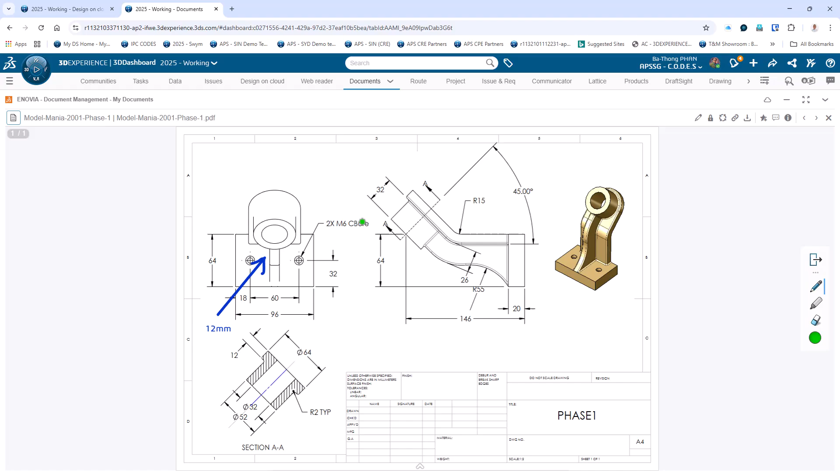And the most important here is the profile of the rib in the middle. So those two dimensions, 146 and 64, are important because they determine the center of the hole in the middle, or the center of the cylindrical boss.

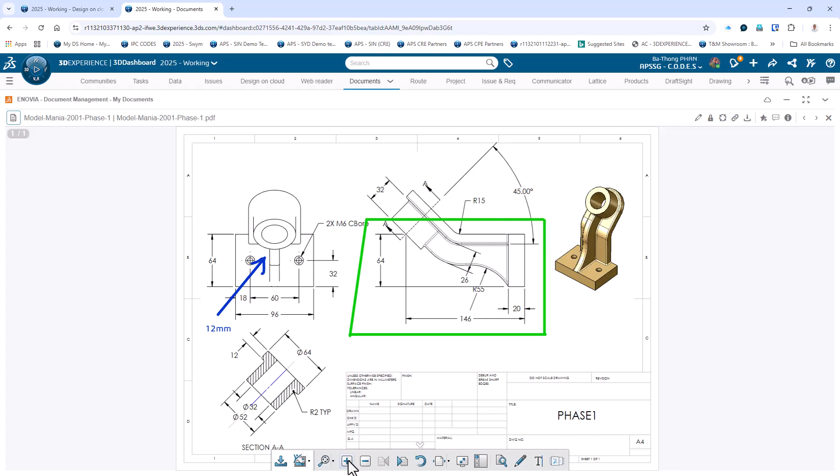So we gotta make sure that point - everything will start from that point. That's how we will build the profile of the back plate. So it all starts from that point, which is the center of the top face of the cylindrical boss, or the center of the hole.

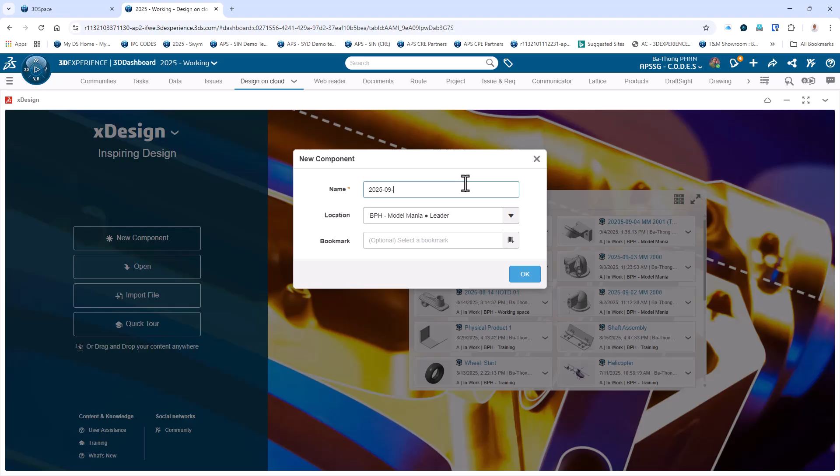So let's start with xDesign. I start with a new component. I name the component and select Model Mania as the 3D space where I'm gonna save the model.

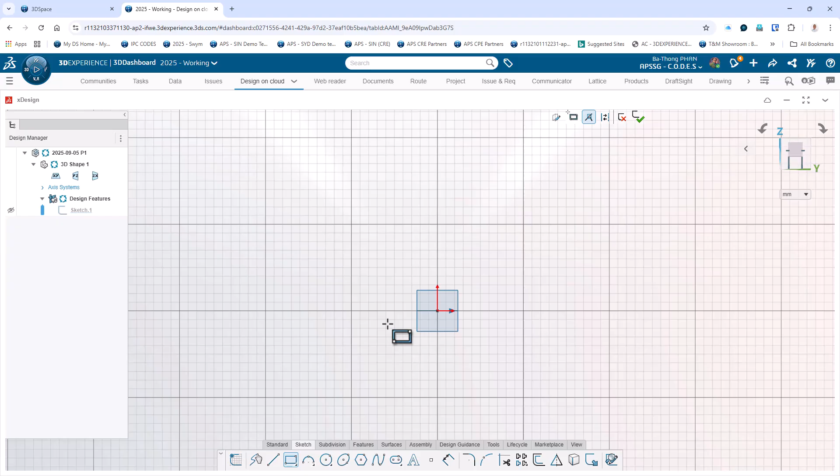Okay, we start with the rectangle on the YOZ plane, and that rectangle will be 96 by 64. You see that it's very similar to SOLIDWORKS actually when you use it.

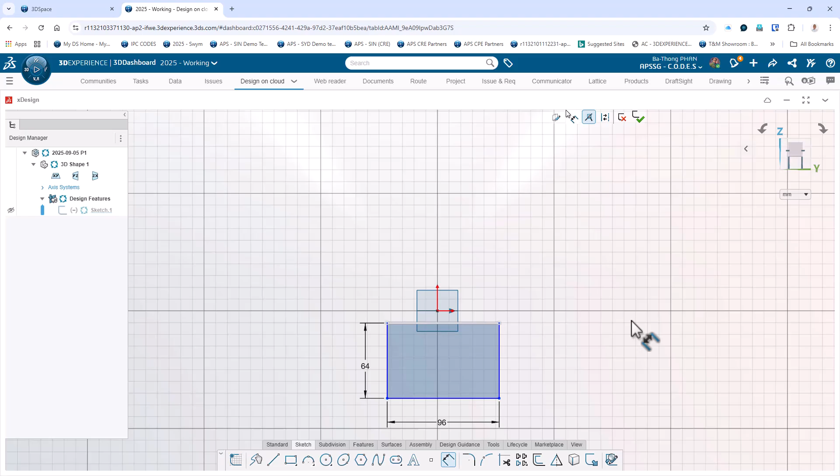So we'll add the dimension, 96 and then 64, and I will center that rectangle. I make sure the origin is in the middle point of that edge.

Now the sketch is turned black instead of blue because it's fully defined. Now going to the features, I'm going to select the extrude.

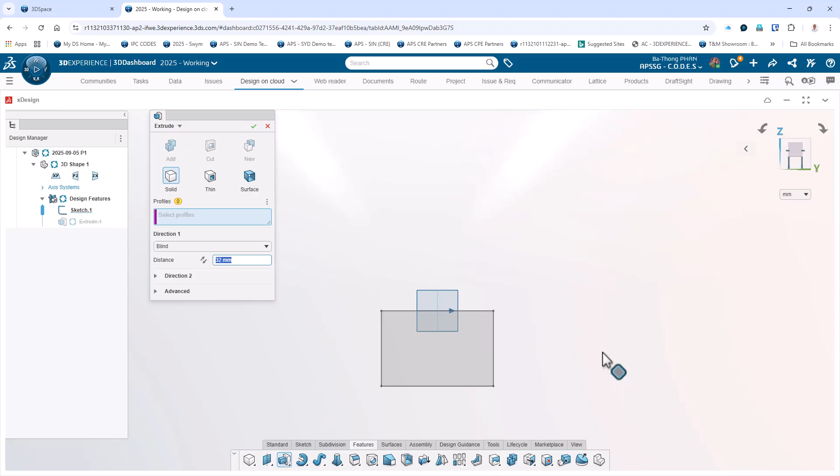And we're gonna extrude with a thickness of 20, a height of 20. Perfect.

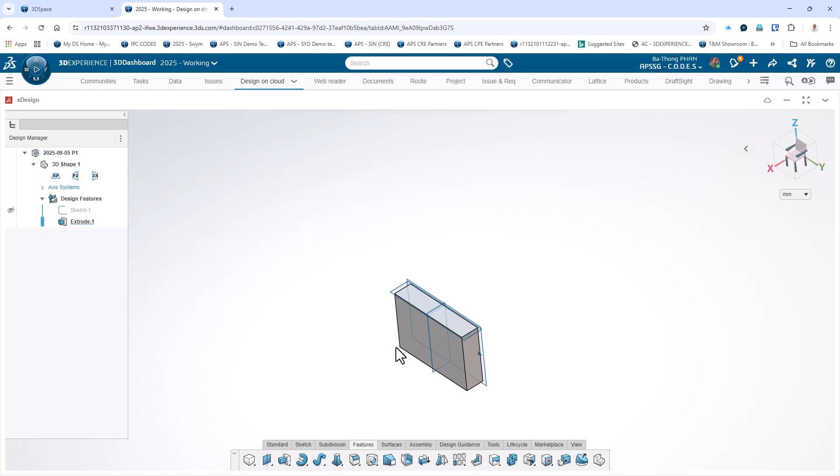Now I'm going to have a construction line. I will create a construction rectangle with the dimension 146 and 64.

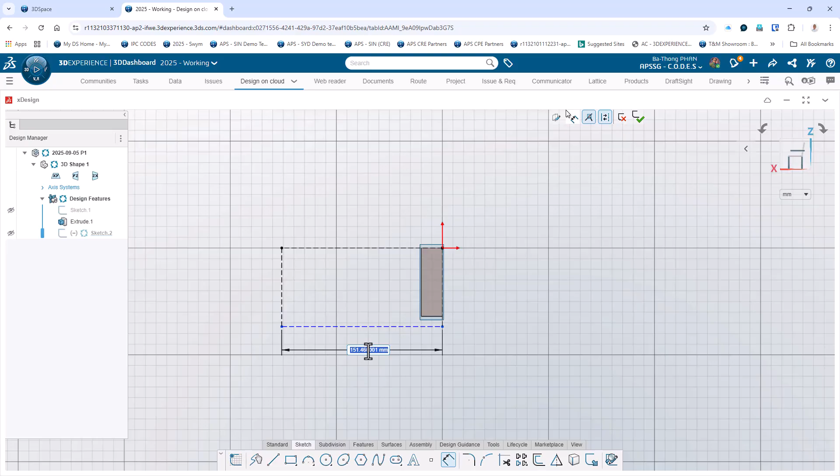I change the construction line and select the first point of the rectangle and the other diagonal point of the rectangle, and put the dimension 146 and 64.

Next, I'm gonna build this axis, the axis of the hole or the cylindrical extrusion. That axis is 45 degrees to the horizontal line, and the length of that axis would be 32, plus the thickness of the plate would be 12.

32 plus 12, that will be 44. So we're gonna build the profile based on this construction line.

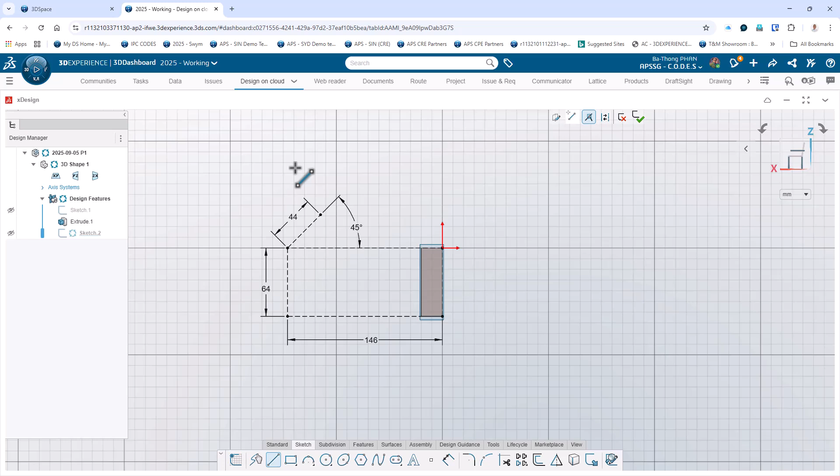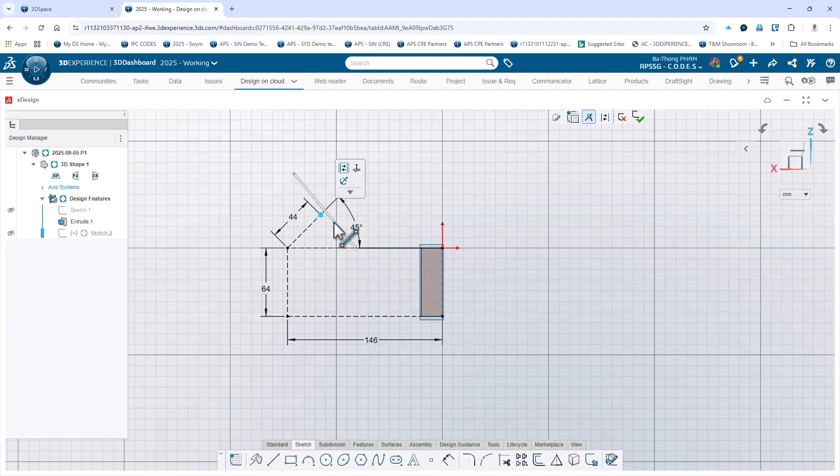So I get one line, and then have another line, and I want to make that endpoint connect to that line - coincidence.

And I will measure from that point to the side, to the endpoint, which will be the 64 diameter, so it will be 32.

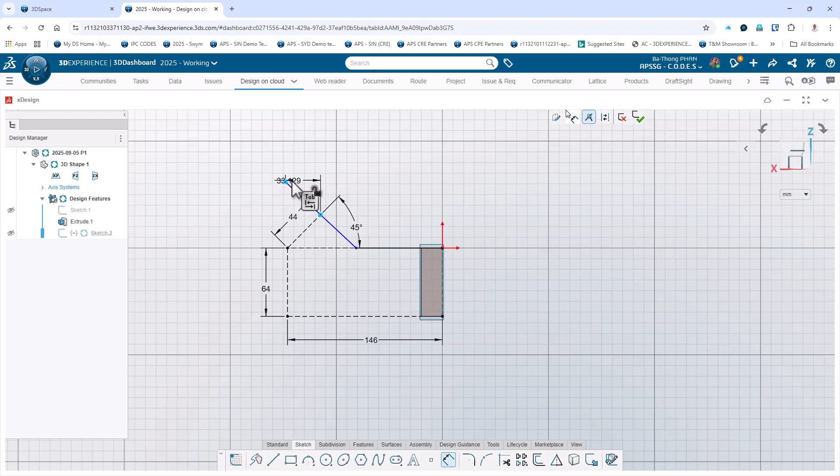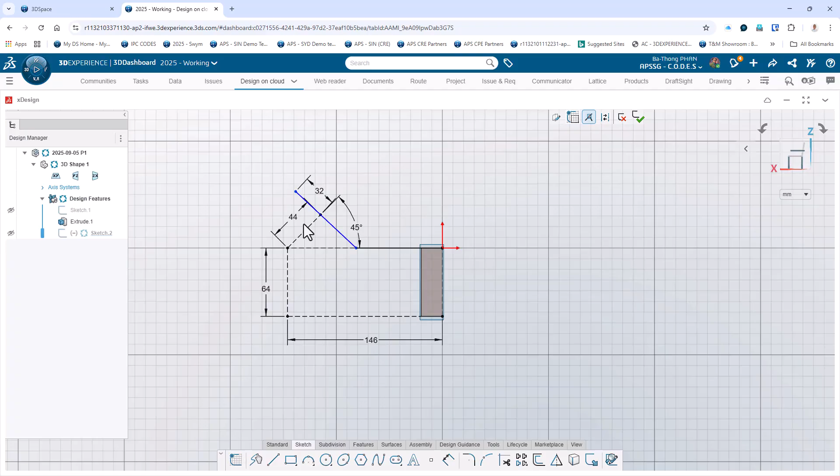Now we also make sure this and this are perpendicular. And yes, the two lines turn black because it's now fully defined.

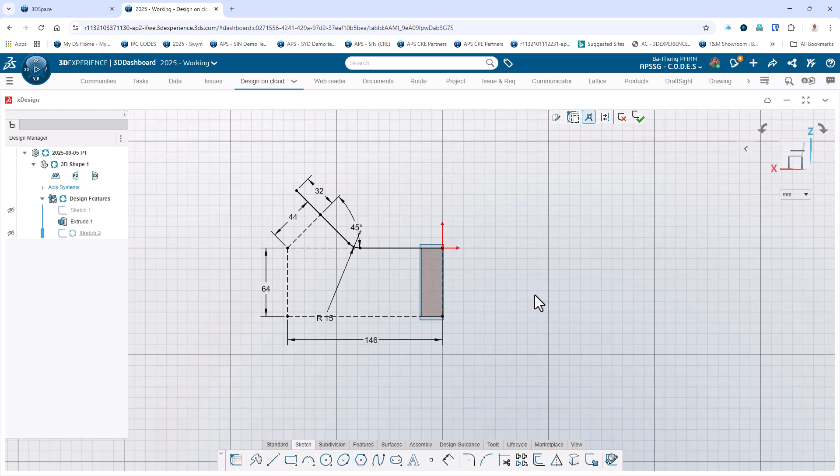We just need to add the radius of 15, and we're almost done with the profile.

I need to create a parallel of 12. I don't want bidirectional, we just want one side.

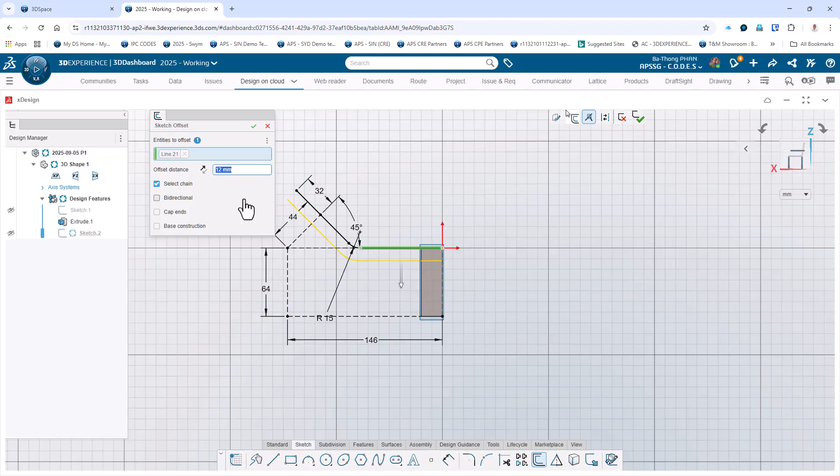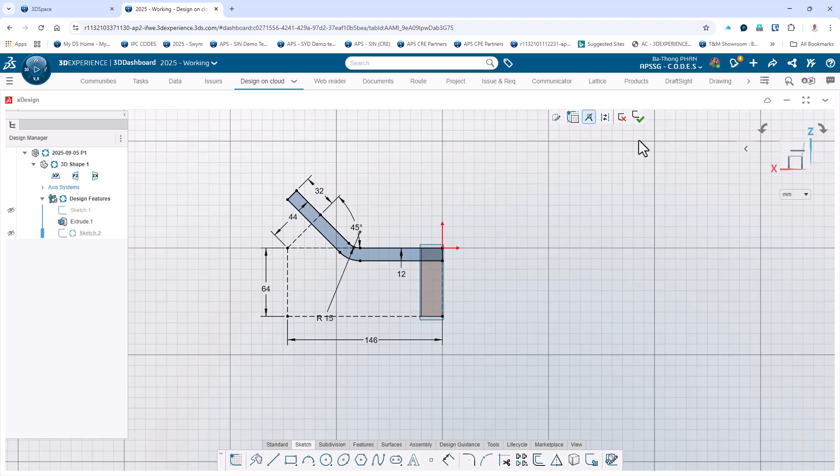Okay, you can see that it's coloring the profile because it recognizes that this profile is now completely closed. So you can create an extrusion from this profile because it's closed.

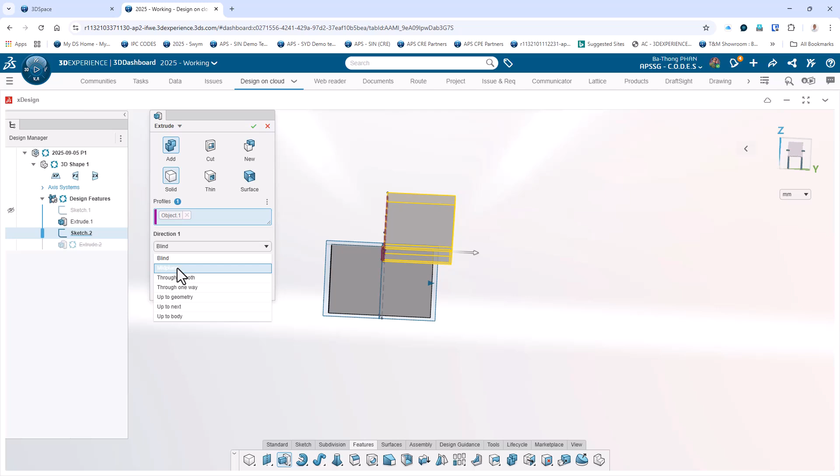So the thickness of this extrusion will be 64. I choose the mid-plane option.

And now we need to round the edges. So I use the full round feature, and I need to select the three faces.

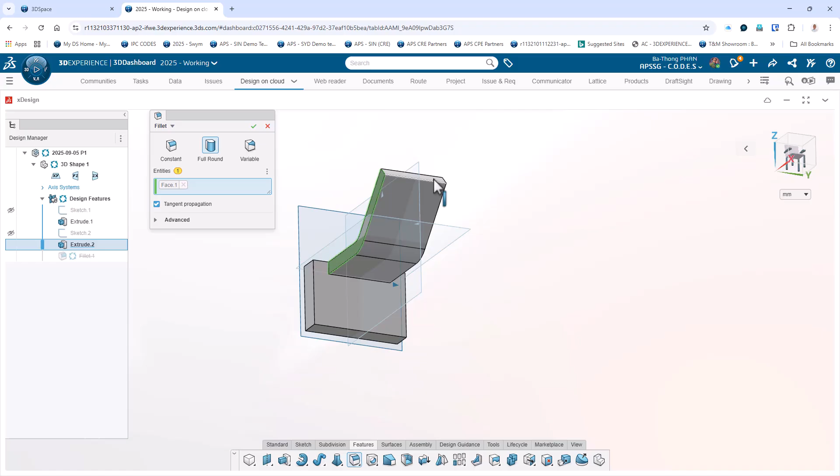If I'm not wrong, in SolidWorks 2001, we didn't have that full round fillet yet.

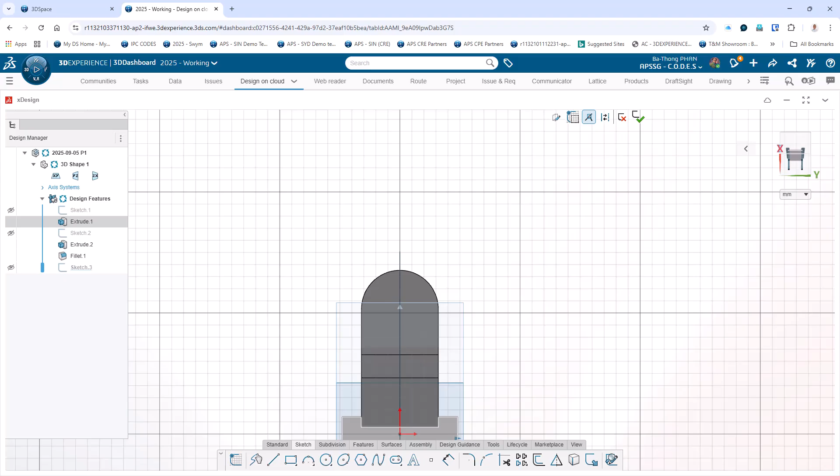So now I'm using that face to create the cylindrical boss and the hole. So I create the circle, the first circle of 52, and then the second circle of 32 will be the hole.

I put the dimension. Yep, it's 52 and 32.

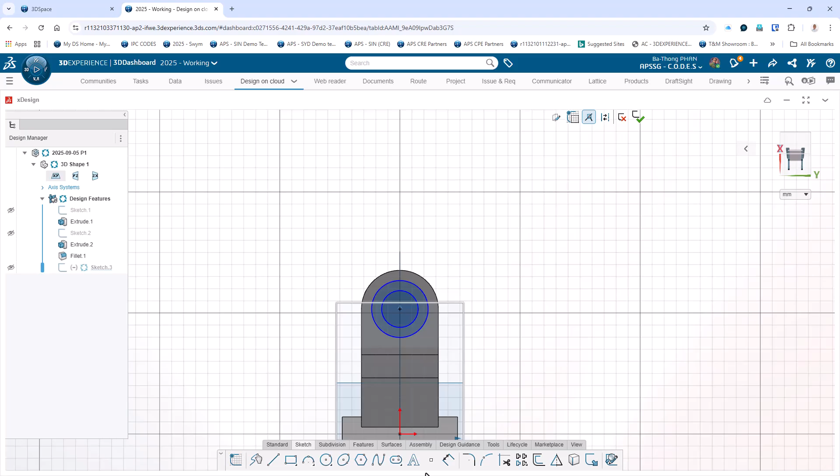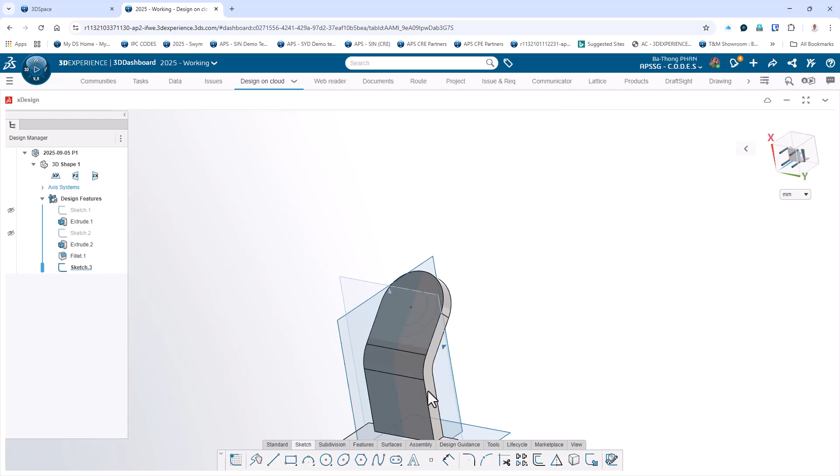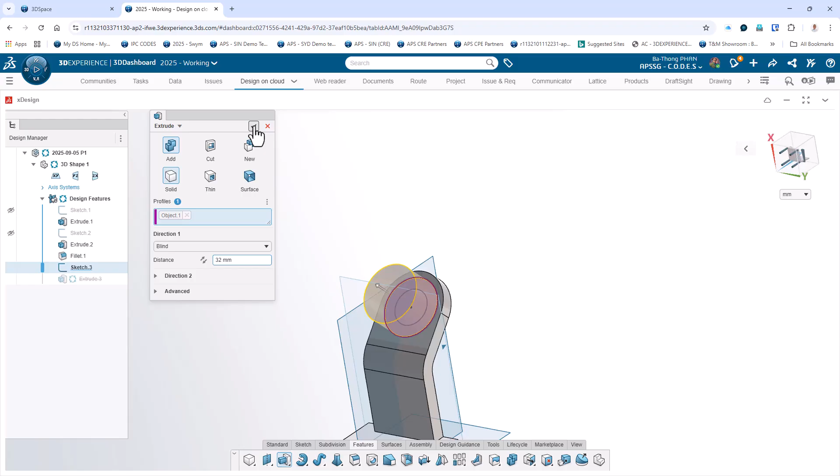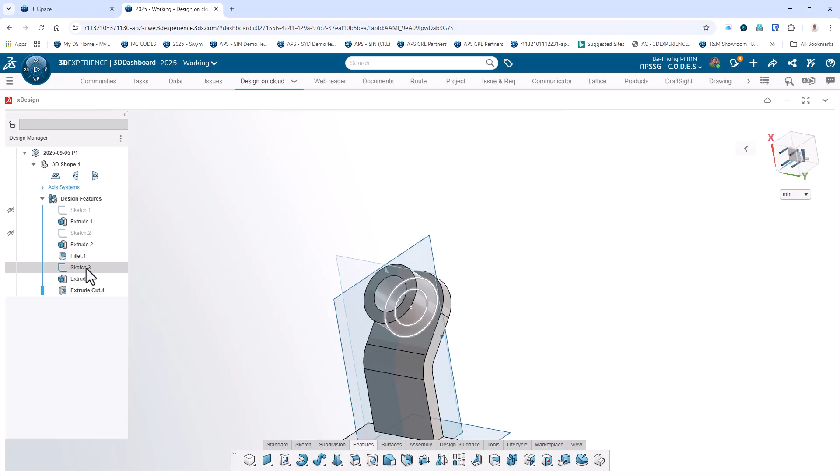Right, exit the sketch. To create the extrusion, I will probably need only the outside circle. It's the 32. And after we complete the command, the sketch is invisible, so I make it visible again, so I can select the inner circle and use it as a hole. Now I make it invisible again.

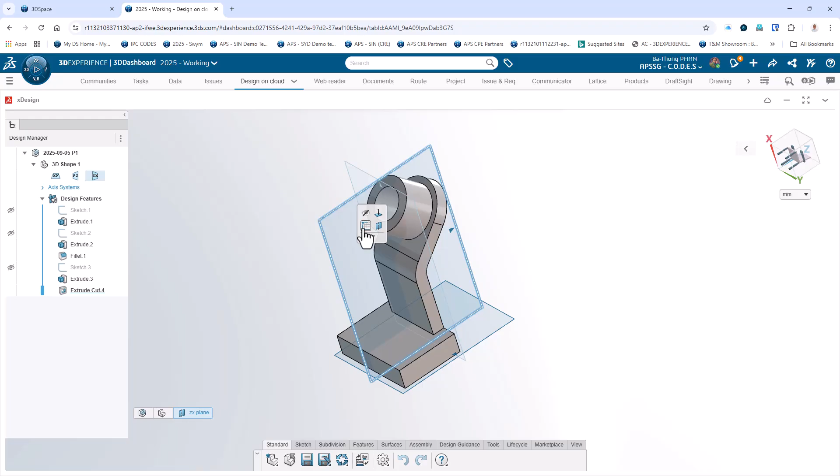So pretty much done. Now we need to build the profile of the rib. So before this, I'm going to save the part first and go to the sketch. We need to extract some profile. So I turn this profile as part of the sketch because I need to create the parallel of this. A parallel of 26.

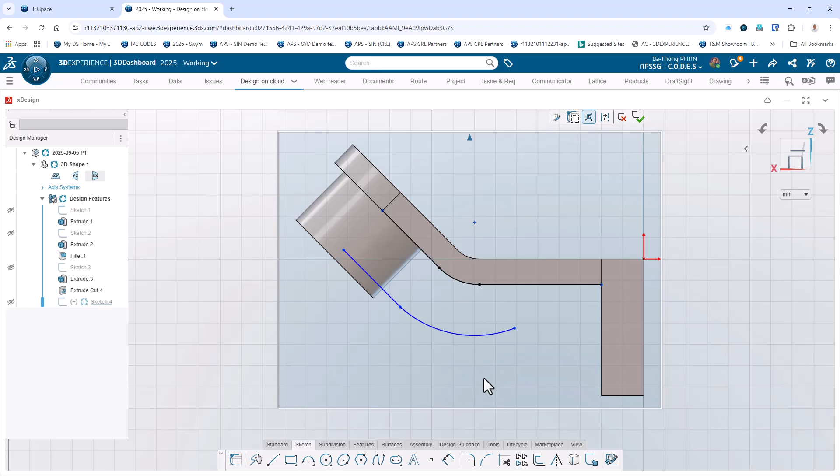But you will see that I will not need all of the 3 elements of the sketch of this parallel. I probably need only 2 of them, so I'm gonna remove 1. Okay, so this arc is not necessarily an exact parallel of the other arc in the middle, but I make sure that the radius of this arc is a correct value. So the parallel is 26, and this radius is going to be 26 plus 15.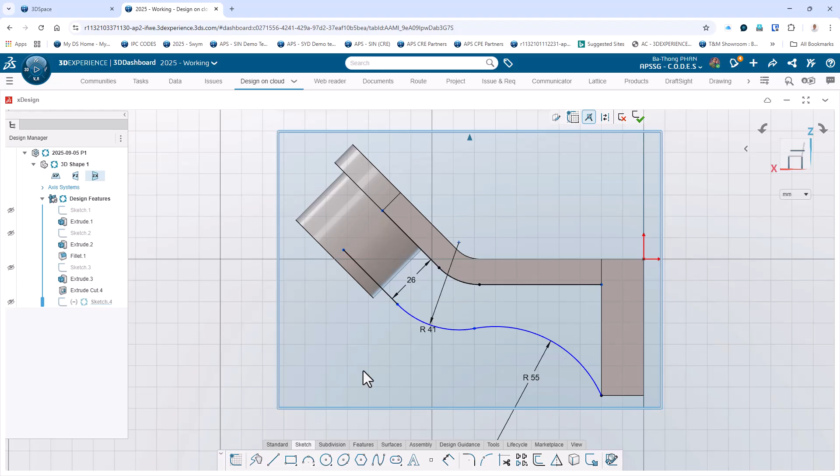Yep, it's 41. So the other arc that I need to build is a 55 millimeter arc. So it goes from that point to that corner. Radius is 55, and we have 2 more conditions. The first one is we're gonna set these 2 arcs tangent to each other, and make sure this and this is also tangent. Excellent. So the sketch is done.

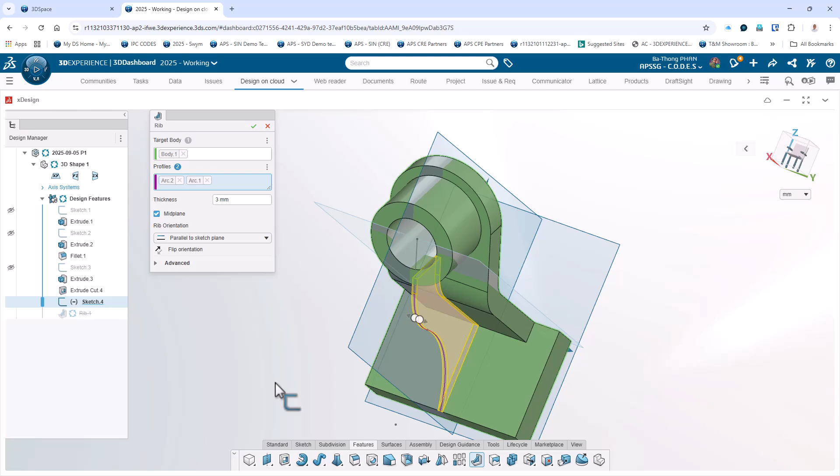Now I'm going to use this line to create the rib. Okay, select the first part of the, oh, okay. I need to change to parallel to the sketch, but oh yeah, we missed the other part. So let's select it again. Yep. And the thickness of this rib is 12.

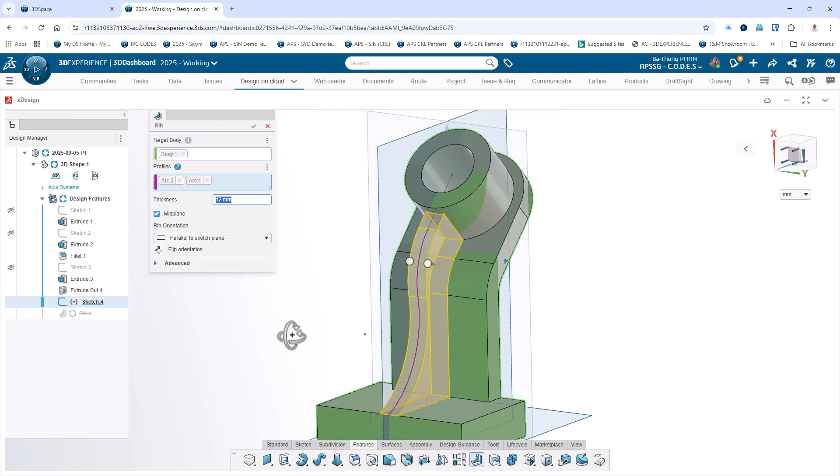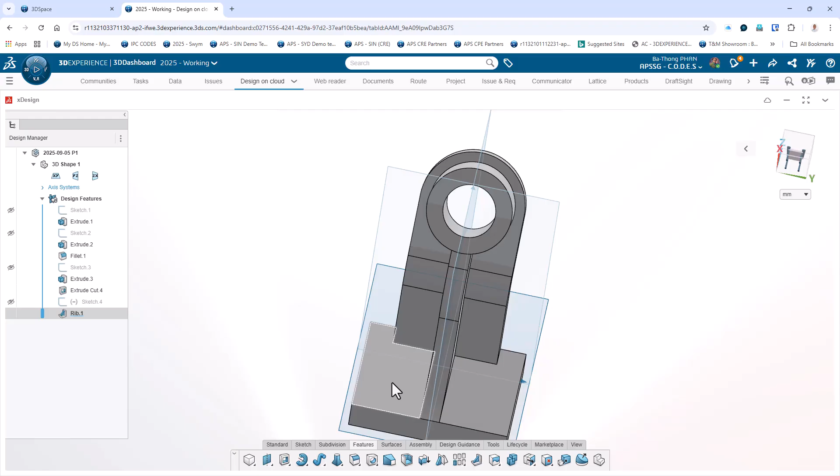Two more features. So we need to create the hole. These 2 holes are a counterbore M6. Their distance to each other is 60, on the 2 sides of the middle plane, so I can use the symmetrical. First, I select the face to start the sketch, 1 point, and then we're going to create a center line.

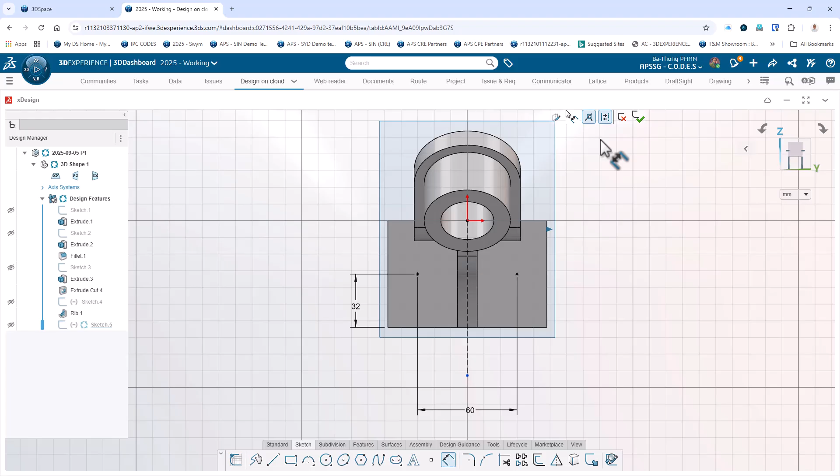I'm going to mirror these 2, and I set the dimension of these 2 to be 60, and I reposition horizontally the center with one side of the edge, 32, which is the middle, right half of the 64. Now I have these 2 points, then I can go to the hole feature. In the hole feature, we select the M6, and it's a counterbore, and yeah, perfect. It's a hex bolt. So for the placement we're going to select these 2 points.

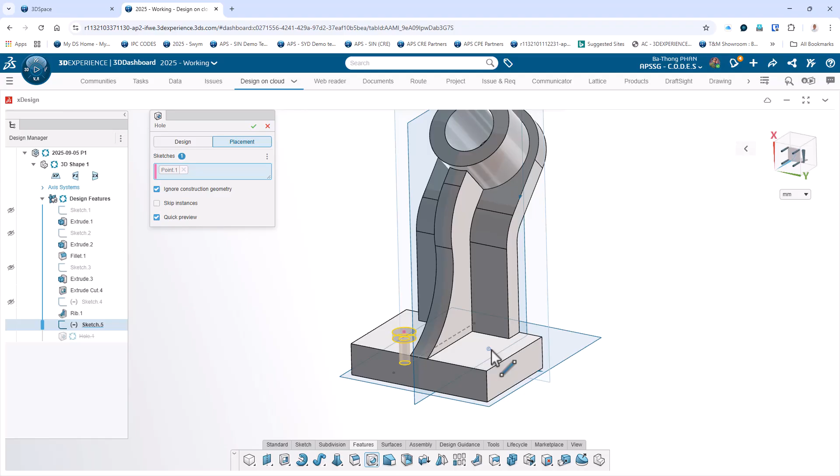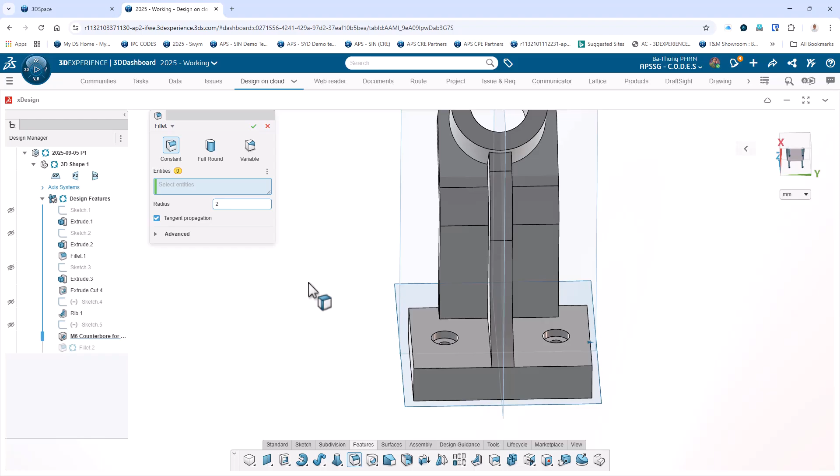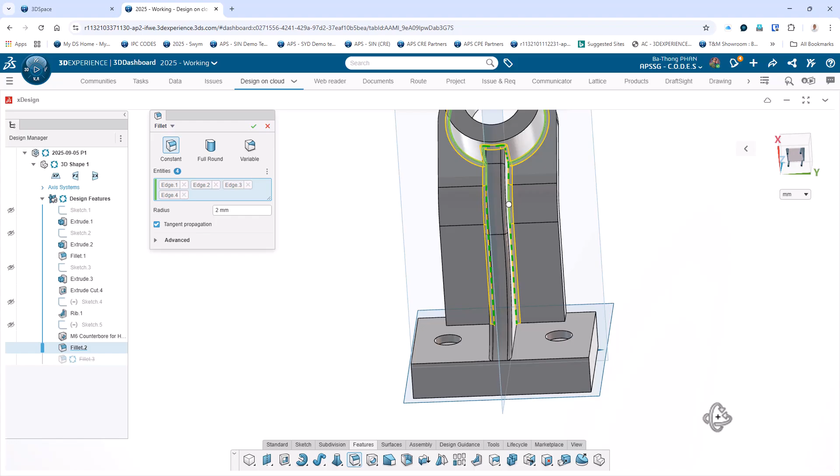Okay, now the last feature I have is a fillet of 2 millimeters around all the sharp edges. So I will do it step by step. First of all, we gotta do the fillet of the rib first. And the bottom fillet of that rib. The side of the back plate. And now we gotta fillet the part that is connected to the base.

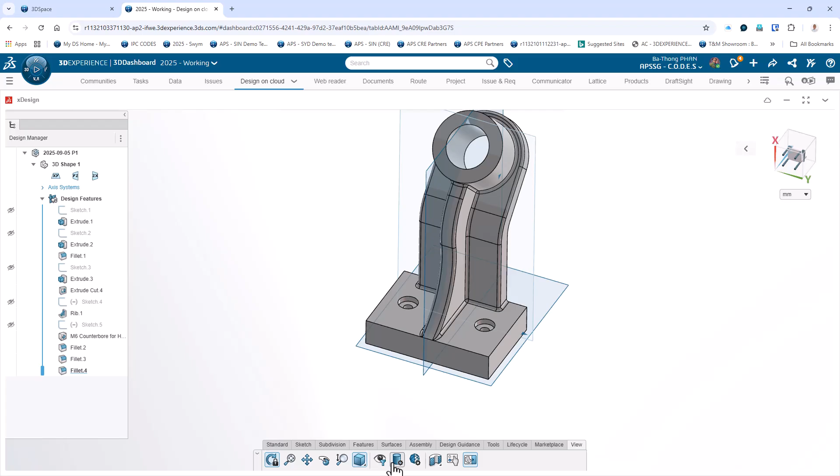And it's done. Voila. It's easy, very easy to use xDesign. I just switch off all the other display and I change the type of display that I want to save along with the model. So that model we're gonna save.